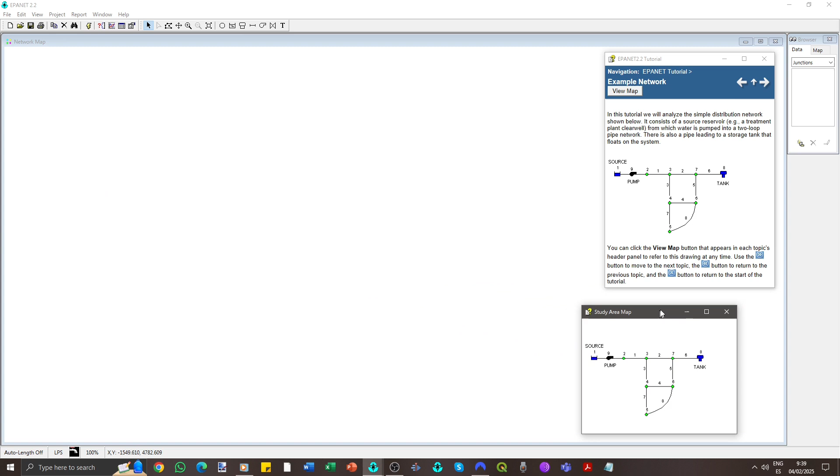First, set the defaults. Go to Project/Defaults and open the Hydraulics tab. Select GPM, gallons per minute, and HW, Hazen-Williams, for head loss formula. These settings determine the units used in the modelling. In later exercises, we'll switch to LPS, using diameters in millimetres and lengths and elevations in metres. But here we will use imperial units.

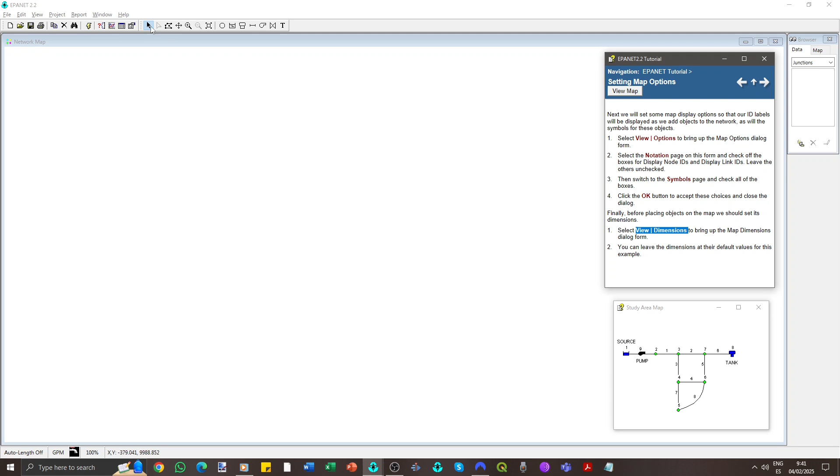To adjust the map's appearance, go to View/Options. Under Notation, check Display Node IDs and Display Link IDs. In View/Dimensions, you can set map dimensions, useful for adding coordinates. Here, we'll leave the default values.

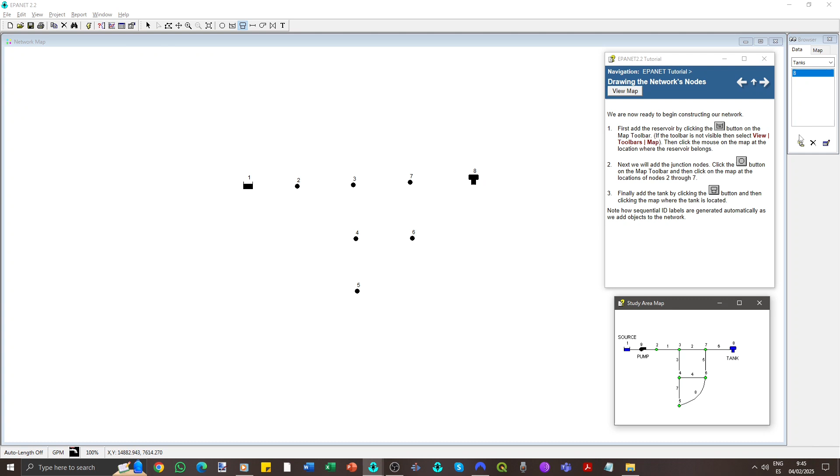Now, let's start drawing the network. Click an object's icon, then click on the screen to place it as many times as needed. To connect objects with pipes, pumps, or valves, click the starting node, then the end point. To draw a curved pipe, click along its path.

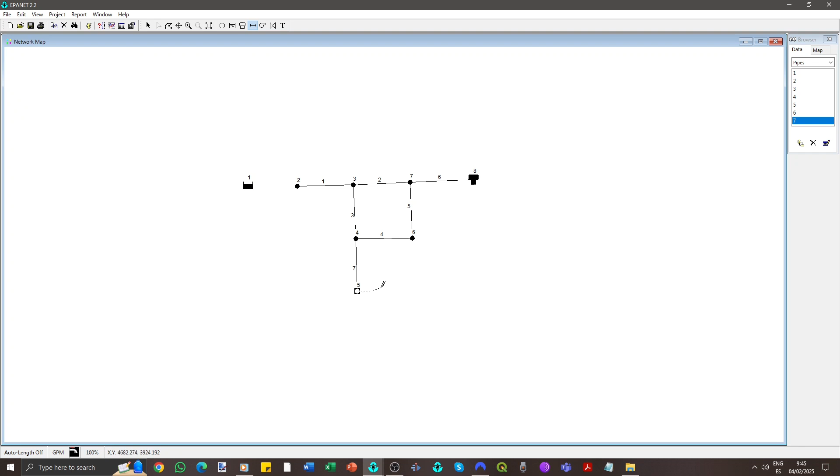It's important to place pumps and automatic valves in the correct flow direction, as they are direction sensitive. The pump icon looks like a cannon. Water flows in the direction the cannon would shoot. You can also add text labels for extra information.

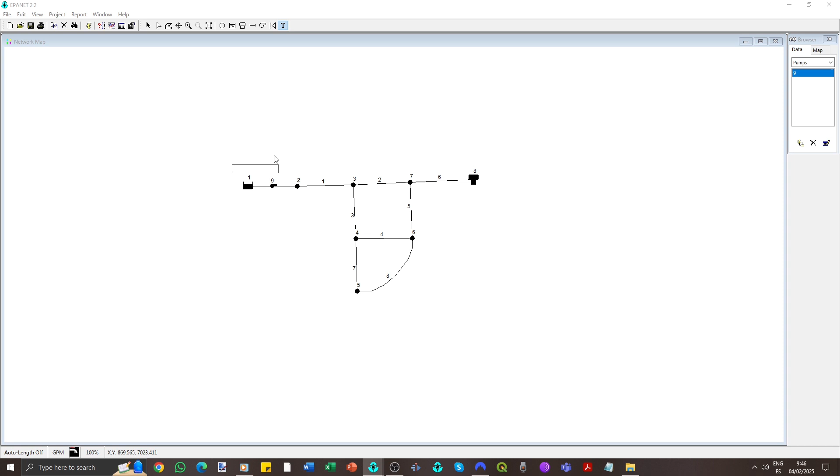After drawing a curved pipe, use the Select Vertex tool to adjust its shape. Click and drag on any vertex. The arrow tool lets you select and move objects. Click and drag to reposition them. Remember, this is just a sketch. Pipes and nodes don't need to be perfectly aligned.

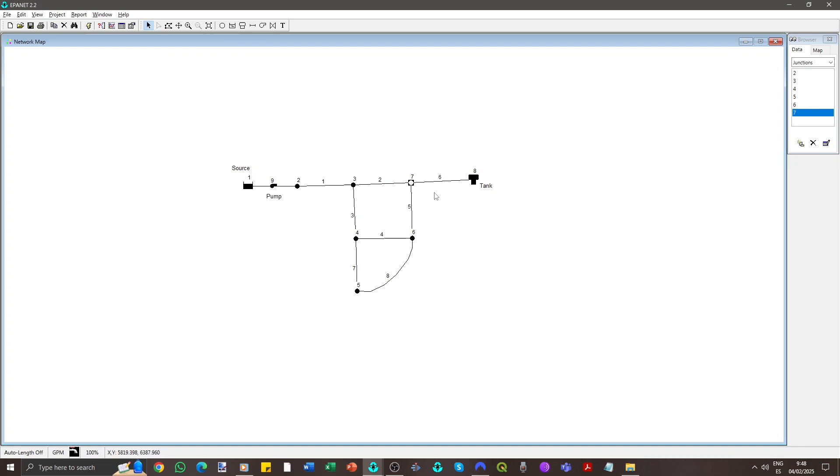Next, we enter object information. In arrow mode, click an object to open its properties. You can modify most values by clicking on them, except for yellow shaded boxes. Those will show the results of the calculation.

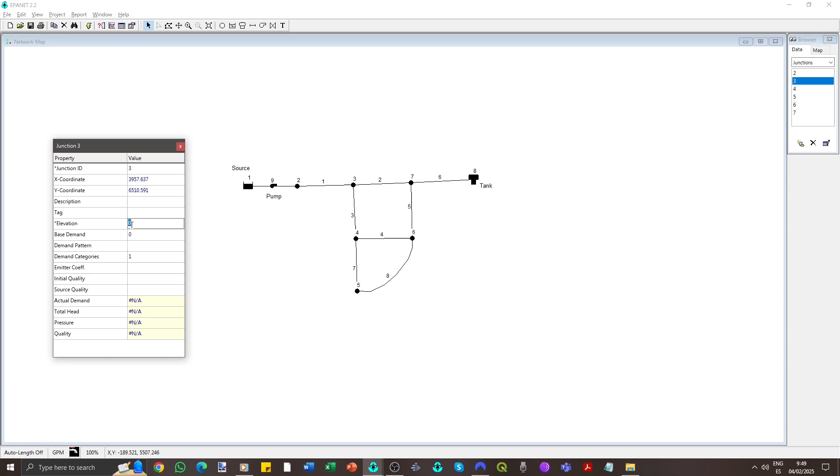After adding the information for the reservoir, nodes and tank, we move on to pipes. Notice the initial status property. Open, shut and non-return valves are set here as a property of the pipe, rather than being drawn as separate valve objects. Now add the pipes information as you have done for the nodes.

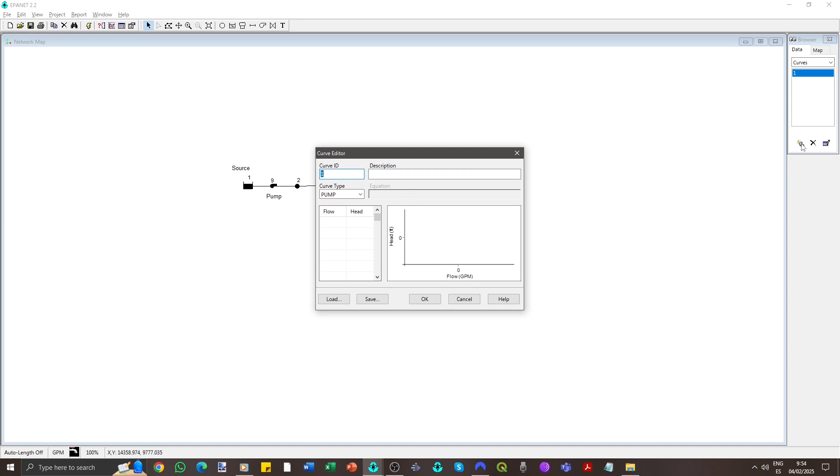The pump is currently generic, so we need to create and assign a pump curve. We'll name it 1. In the browser, go to Curves and click Add. Enter the flow and head parameters. The default name is already 1, so no need to change it.

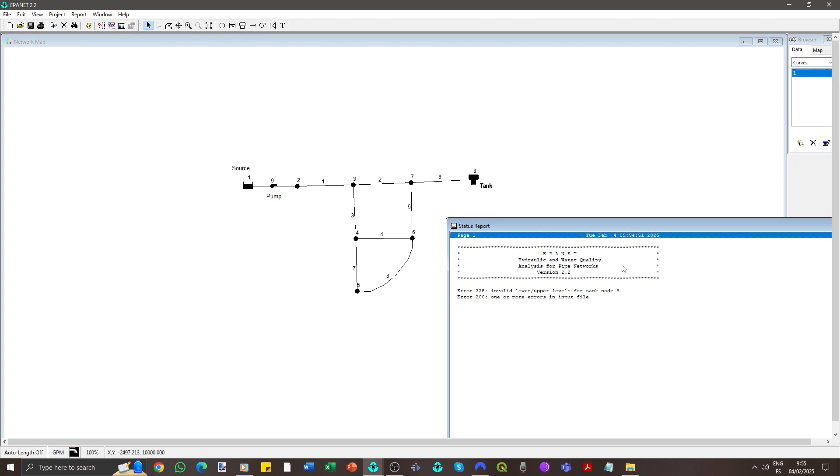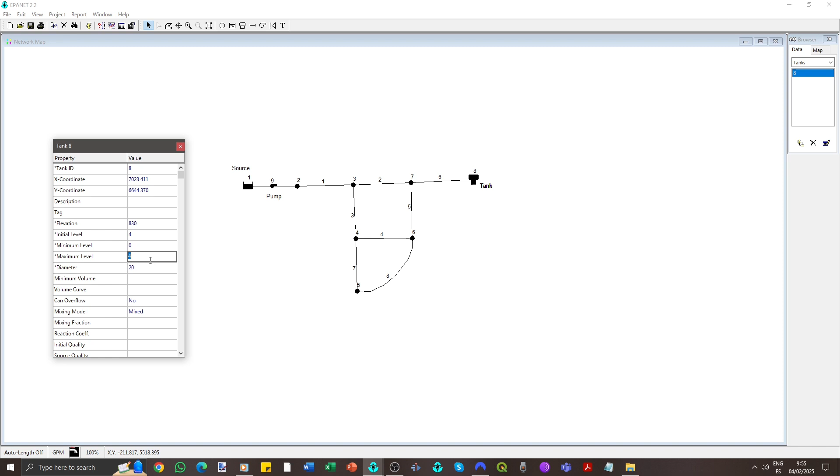Once we see Run is successful, remember, this doesn't mean the system is optimized or ready to build. It only means the simulation ran without errors. The tutorial continues beyond this point, but we'll leave it here to keep it manageable. There's a separate video in this series about visualizing results.